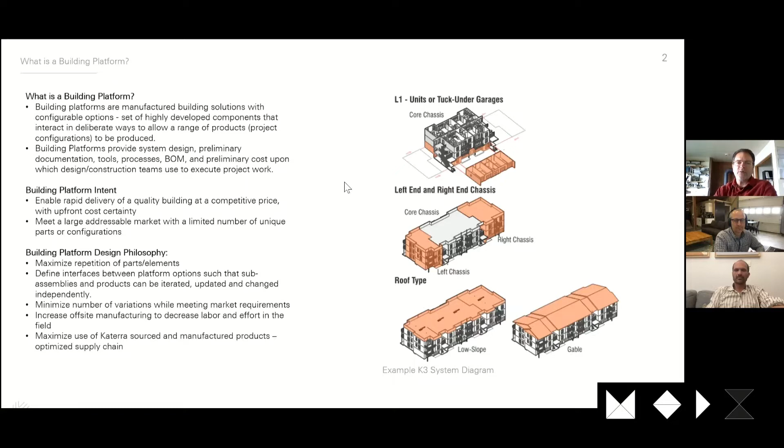But really what we're trying to do here is provide a configurable building solution. And we do that in this size platform by having a combination of fixed and flexible parts to the platform. So in the case of a 3-story multifamily platform, we have a fixed chassis in the middle, and then we can modify the ends. This is a 3-story, 24-unit walk-up that you see all over America.

There are millions of units of this house, and it's one that our launch customer heavily invested in. And so we decided to make this the core of our first platform. And what you can see here is that even with the amount of consistency we have within this platform, there are 288 different configurations that come out of this. And within those, you have thousands of options for interior finish changes.

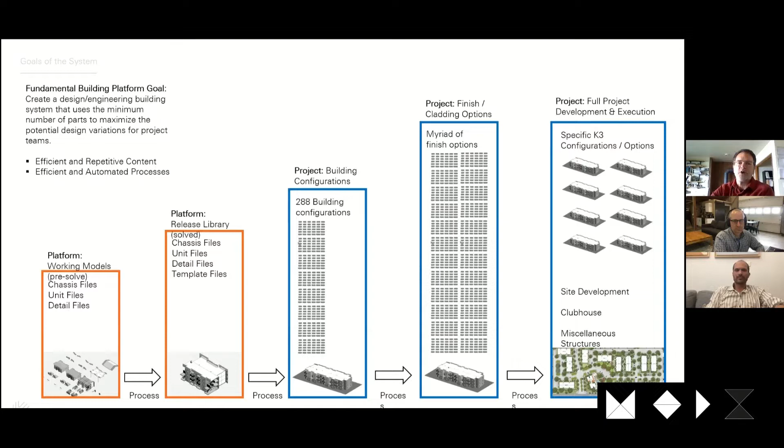And then all of these choices that you make along the way are then configured into an actual building project. So with this particular platform, this is again based on a 3-story, 24-unit building. And we can incorporate tuck under parking, as you see here on the top image. We can have a gable roof in the center or a flat roof, and we have other options as well.

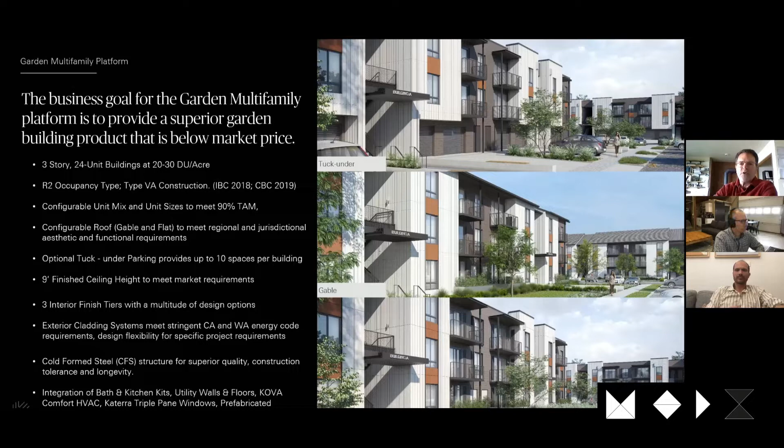But those are the 3 main building configurations. We also have different building assemblies or manufactured assemblies that are part of every one of these different configurations. The kitchen kits are consistent, the bath kits are consistent, load center, and so on. These are manufactured assemblies that we're building in our factory that go into each one of these configurations. And then the flexibility can be in the variation in wall panels and floor panels and so on.

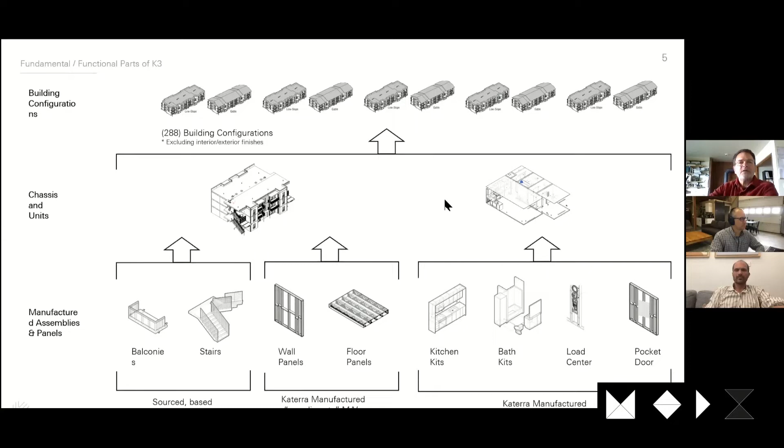So here's a snapshot of what this looks like. We have 12 unit plans that can be arranged in different ways on these ends. The center of each one of these buildings remains constant, and then you can modify the left module and the right module in different configurations. Flat roof, gable roof. We have 2 different types of mechanical system, either a vertical terminal heat pump system or a proprietary KTAC, which is a system that we've developed that is in final stages of manufacturing currently.

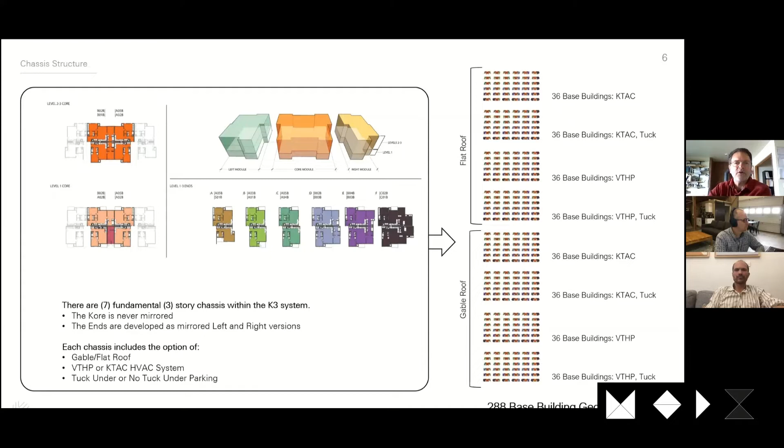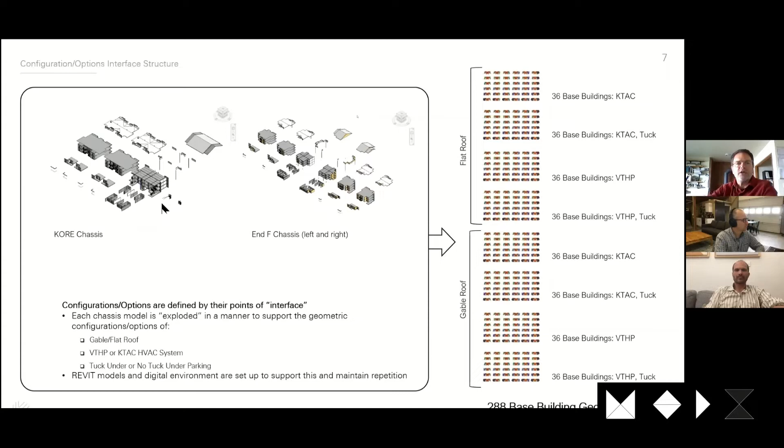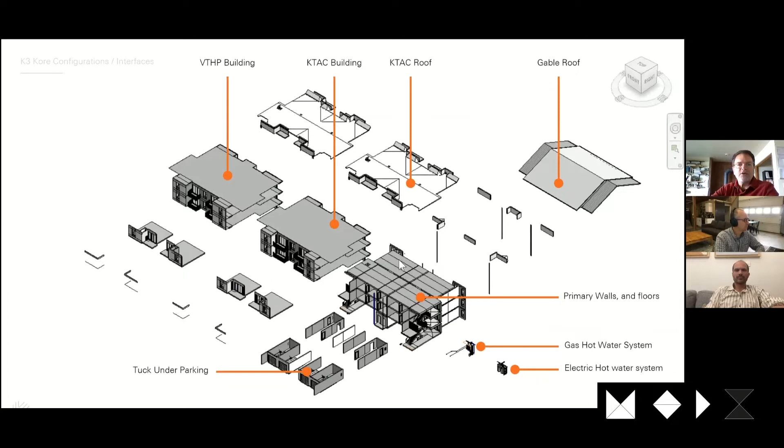So again, some diagrams showing the different ways we can configure this kit of parts. It's a platform being a configurable building system. Each one of these elements within this configured building has to be detailed in a way that architects and engineers are just not used to doing. It's not common in this industry. It's more like how you'd see building an airplane or an iPhone, where you have to have every single detail down to the bill of materials and to the manufacturing drawings.

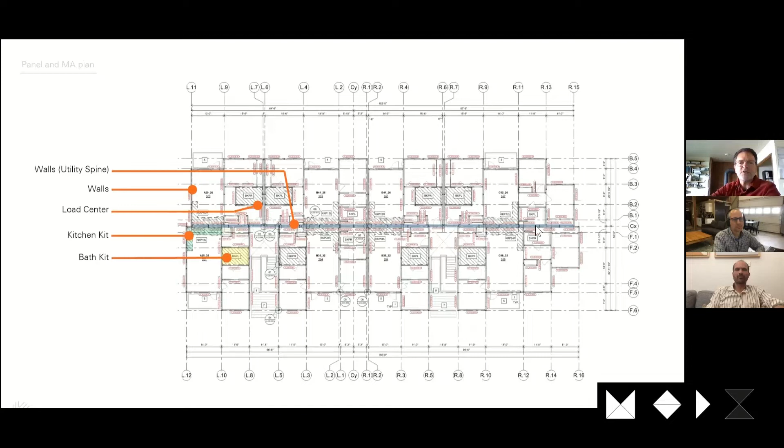This shows some of those common elements. Again, we have bath kits, kitchen kits, and things like that are reusable within various platforms. And then there's still a bit of configurability that's left to the architect. This particular building platform is configured around a central spine. So trying to be economical and arranging all of our plumbing, all of our wet services around a spine.

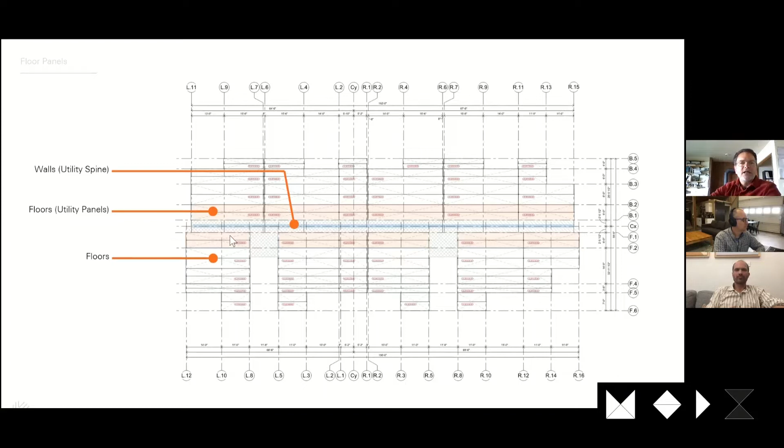This gives you an idea of how different it is to design in this way. With every one of these floor panels that we configure in our factory, that requires 8 sheets of shop drawings just for each floor panel. So you can imagine, to do a fully detailed 24-unit building with this amount of detail is thousands of sheets and thousands and thousands of data points of information in order to provide that level of detail that's needed to go to automated factory equipment, including work instructions in the field for how things are assembled. And it's just truly a different way of thinking about designing, manufacturing, and assembling a building.

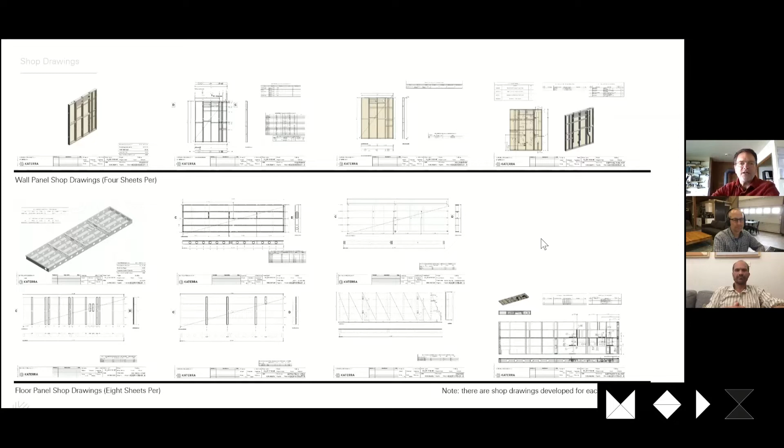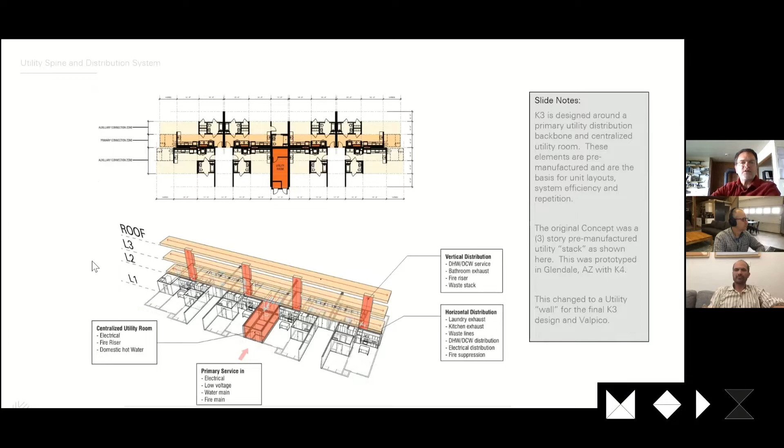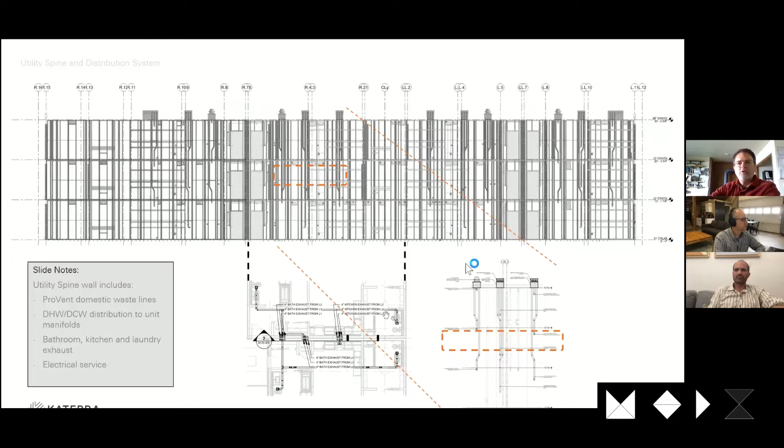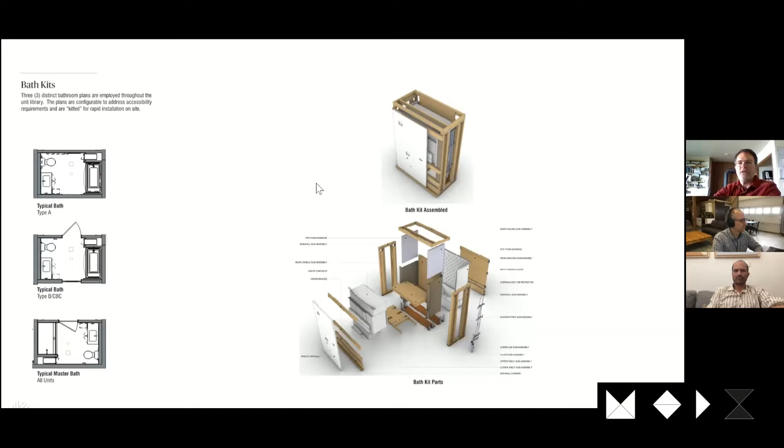This is a picture of how our bath kit works. It's not a full module. It actually comes packaged up. The reason we've decided to go flat pack and not volumetric modular, I think, is illustrated here. This is a way that we can provide the same efficiency of a bath pod, but we can pack it in a smaller volume, so that allows us to be more economical with logistics. This is how that bath kit comes delivered to the site and then fully assembled. Same with our kitchens.

And then on the interior finishes, we have various options. So you can pick from within our catalog. We're a vertically integrated company that owns our supply chain, including our own lighting line, ceiling fans. We have our own appliance line, bath and kitchen fixtures, and so on. They've all been curated to work very well together, much like you'd curate the interior finishes of an automobile, of your Audi. You know for sure that whatever you pick, it's going to look good together. That's the same rationale we have with our catalog of interior finishes.

So you have various options for color and texture. It's a narrow catalog, but it's all extremely high quality. It meets all of our requirements for aesthetics, for sustainability, for environmental quality of the materials, and smart sourcing and things like that.

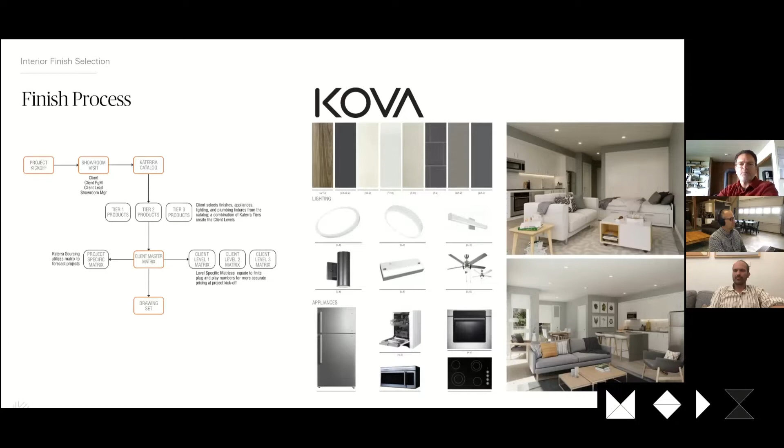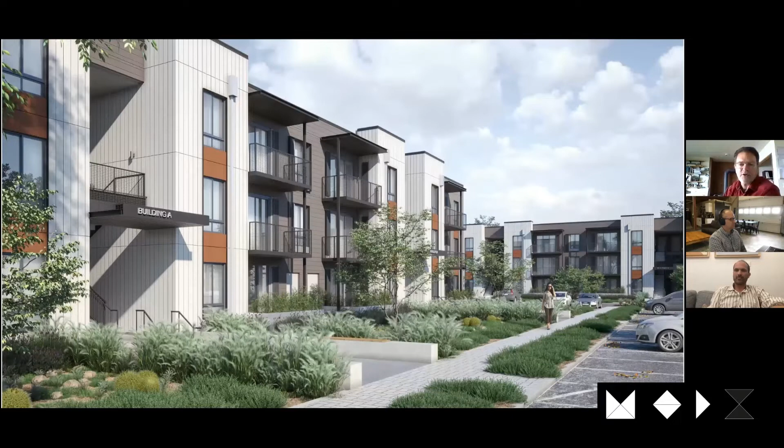So some images, both interior and exterior, of the various options that are available for that 3-story platform. And I can share another one with you, but are there questions, Ryan or Ivan, that you have about that first platform before we move on?

Maybe just to point to the viewers that we're discussing a platform built around a panelized system, so that folks know the kind of building system that it's supporting, the manufacturing system. But otherwise, I think it would be great to hear another example, and then maybe just one question on this particular platform for the walk-up apartments.

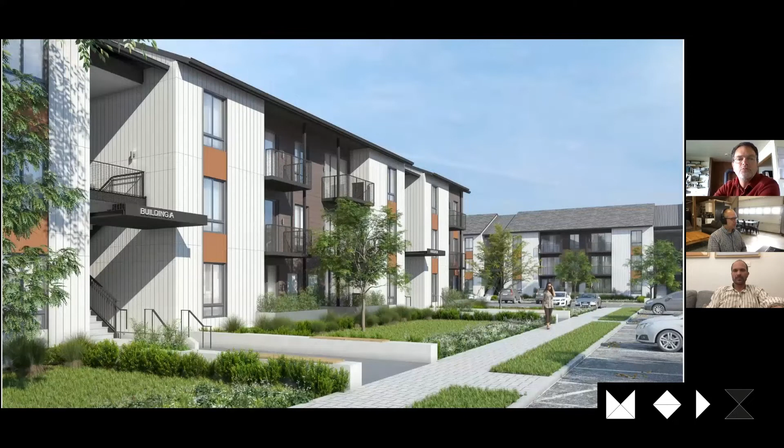Are all of those elements manufactured in the same factory, or, say, like an Apple iPhone, they're manufactured in 3 different places and brought to the job site to be assembled? What is the supply chain strategy? That's a good one. You want me to go back to one of these images and hit on that? That'd be great. Sure. Let me see. Maybe I'll use this one. Yeah, the plan would be great.

So this is the typical unit plan that you see here for our 3-story multifamily garden platform. And what you can see, some of these shaded walls, this is, again, a flat pack, not a full volumetric modular approach. So we have the ability to manufacture all of these items in our factory in Tracy. So we can do wall panels, floor panels, bath kits, kitchen kits, load centers, cabinets. We have our own window line.

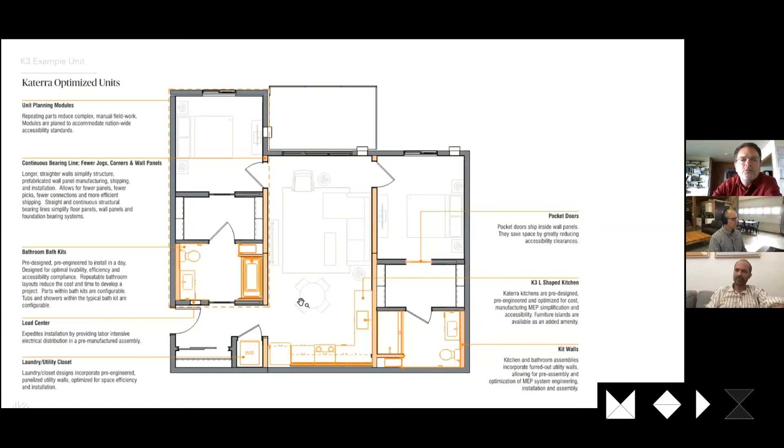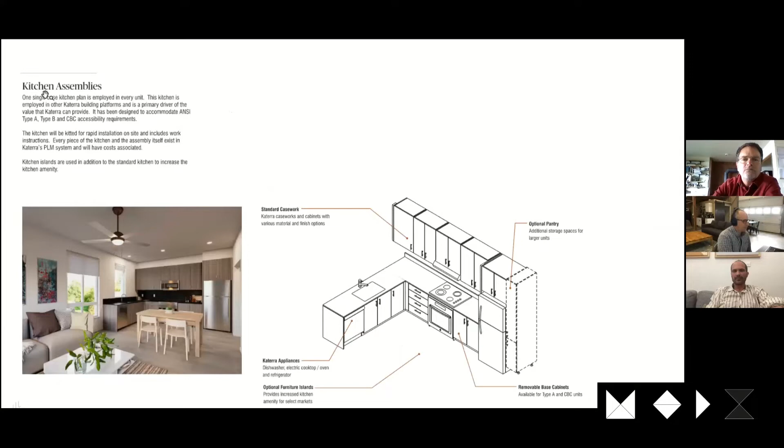That's all done in our first factory in Tracy, and we plan to have multiple factories across the country to be able to provide the same capabilities. Okay, that helps. In Tracy, California, right? Yeah. That's great. Why don't you go on to the office platform? Okay.

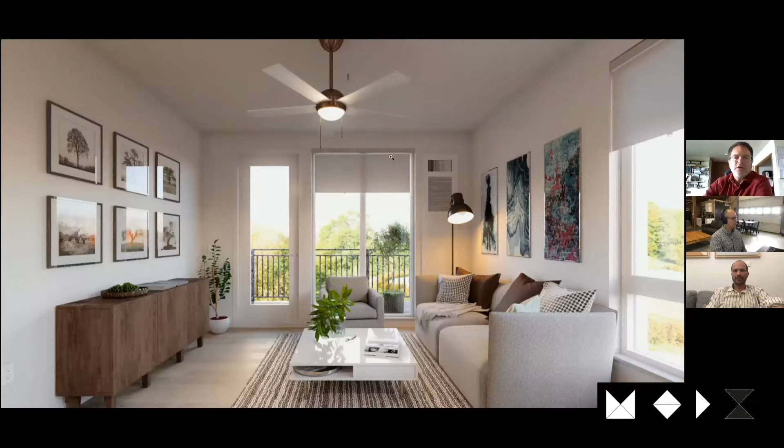So the next platform I will share with you is quite different than the first one. The K3 low-rise multifamily platform is built around a particular building type that everyone is familiar with if you're in the multifamily world, that 3-story, 24-unit walk-up building. In the case of commercial office, it's very rare that you would have exactly the same building configuration repeated. So in our mid-rise platform, we have to provide much more flexibility.

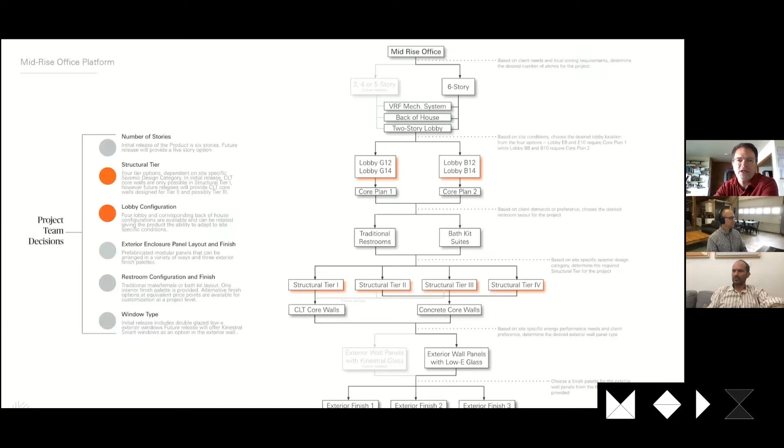We also have some interesting challenges in commercial construction regarding the structural requirements of the building based on the seismic zone, wind load. We have different climate constraints and climate zones that have an impact. There are different labor issues around concrete versus steel that can impact how you design things like your seismic system. So all of those things have to be considered when you're trying to design a 48-state solution platform for commercial office.

At the heart of everything we're doing commercially is mass timber. We built a mass timber manufacturing facility in Spokane Valley, Washington. It was the largest investment the company has made in manufacturing capabilities. It's a very big bet on CLT as a new way to build that's going to drive a lot of new building techniques in the future. And when you think about CLT and its advantages, it's just perfect for the Katerra model of offsite fabrication and field assembly.

It's a very large format product. Our press is 12 feet wide and 60 feet long. It's made with incredible precision, within a few millimeters in a 12 by 60 panel. Very few people are needed to manufacture the material compared to volume, and very few people are needed on site to assemble it. So the efficiency is tremendous, and it's perfectly suited for the kind of modular and off-site company Katerra wants to be. This is, again, not a volumetric modular approach, but more of this flat pack approach.

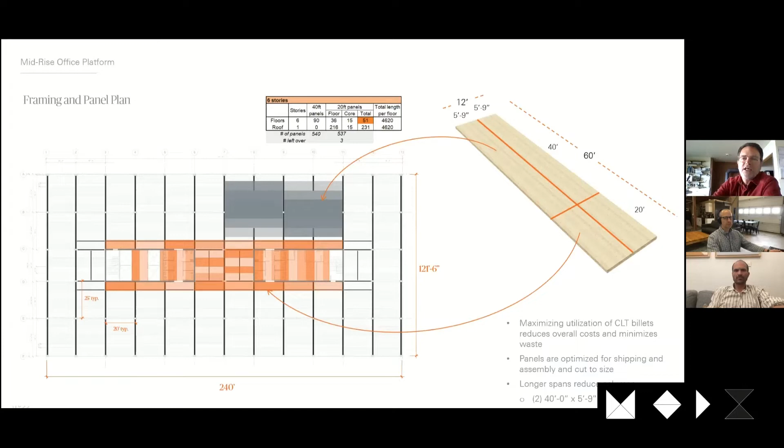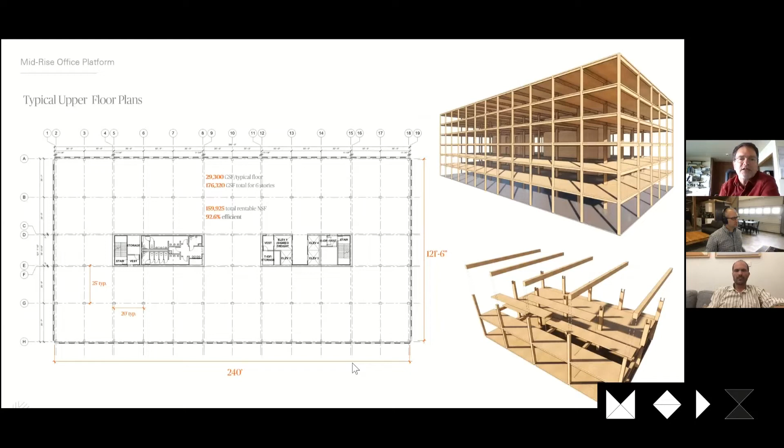So our system is built around a 20-foot module that works well with our 60-foot panel. We can cut it into 40-foot and 20-foot panels for ease of logistics. The 20-foot panels we can use around things like the building core where you have different loading. So these platforms have to be designed really smart around the manufacturing capabilities. Multifamily is built around our Tracy, California plant; commercial office is built around our CLT plant in Spokane. Yeah.

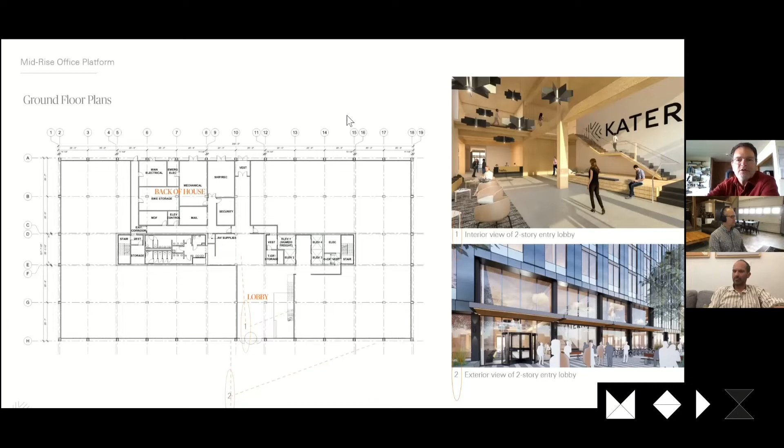Here we go. So this is a representative image of what a Katerra commercial office platform building could look like. There again, there are all kinds of options in terms of the final exterior finish, and even the number of stories, the length of the building, the width of the building. But it is designed around a module, that 20 by 25 module, that is super efficient for us to manufacture in our factory. This includes the option for a 2-story lobby.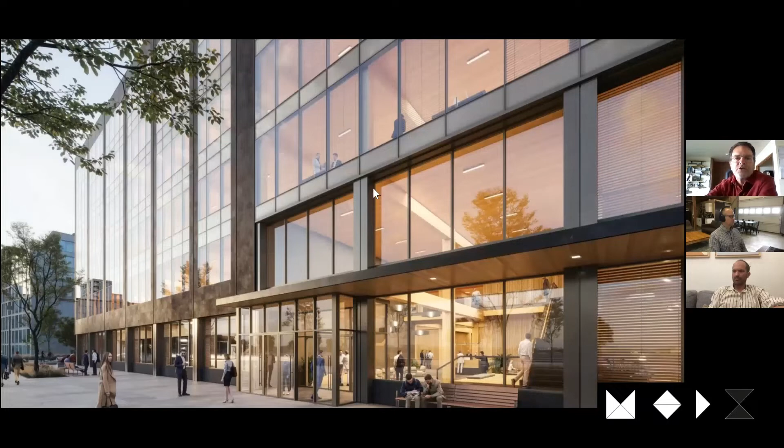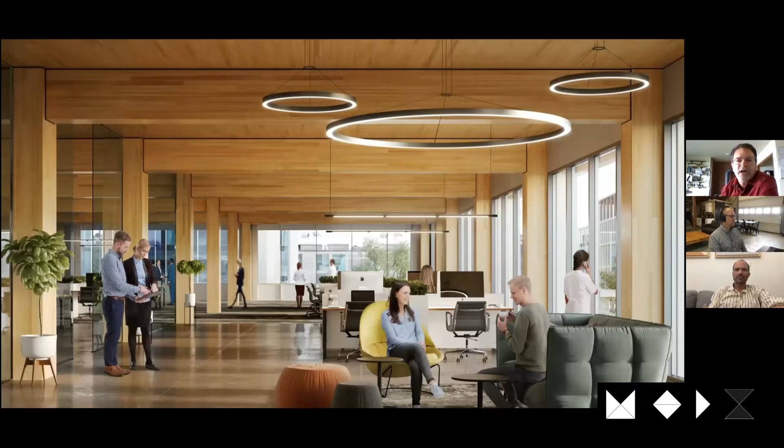And here you can see the building structure. This is that 20 by 25 grid, which we've determined to be the most economical way to fully utilize a combination of a glulam and CLT office structure. We've designed it around a 48-state solution, so we have automated engineering that goes into this based on the seismic zone.

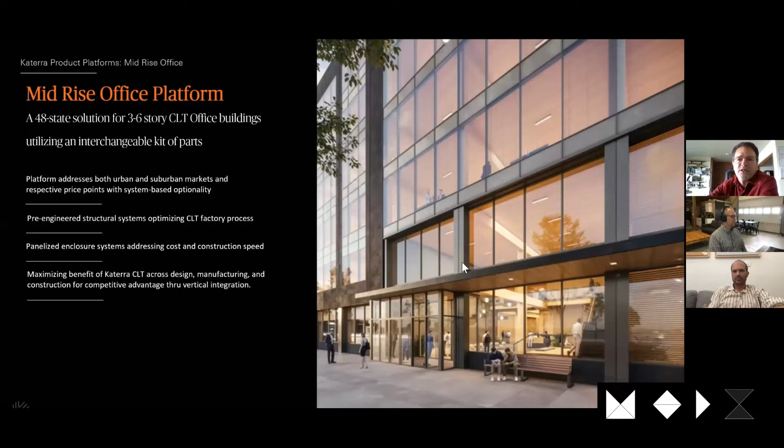And again, various configurations for the exterior skin. We just provide some general guidance of what we can provide out of our factories, and the design team, architects, and developers can choose to do whatever they'd like to do for the exterior. We're doing some. No, I understand.

Go ahead. Well, I know that you're manufacturing all the CLT, and then you have a supply chain of finishes, lighting, HVAC. I wondered, specifically on the exterior enclosure, if you own that exterior prefabricated enclosure company, or is that a third-party manufacturer still? Yeah, good question.

Yeah, for the exterior skin of commercial office, we are currently developing some window wall options that utilize our cold form steel capabilities out of our Tracy factory. Obviously, when we get into these taller buildings, we can't use our vinyl window line, and we'll have to go to a commercial product. But we have preferred partners that are part of our supply chain.

We have companies in Mexico and a company in Wisconsin that we can combine the IGU units and the aluminum frames and assemble those into a very cost competitive exterior skin. So we can offer that. And we can offer a curtain wall system as well. Mm-hmm.

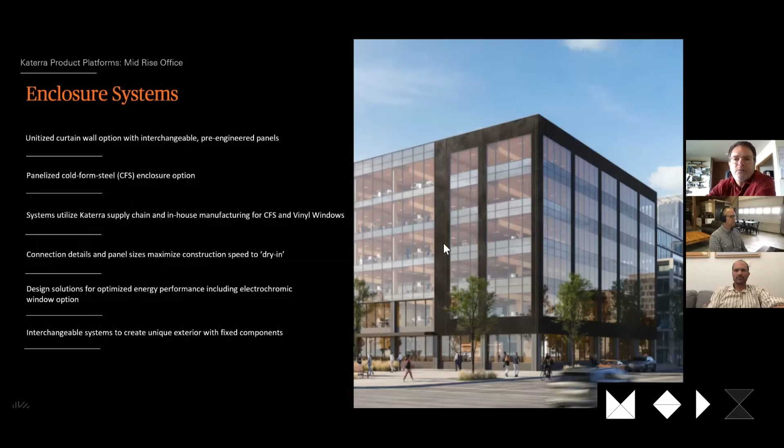And our commercial line is not as developed as our multifamily line, but it's coming along. We do have a configurable conference room system that we do have available. We have a commercial lighting system that we just launched. And we're working in a partnership with the McKinstry company. They are developing a product. It's a new spin-off of McKinstry called Overcast.

We are utilizing a different software in the commercial office platform, and this might be something that we take to other platforms in the future. We've been very impressed with the difference it makes when you're using a software system that's actually designed for manufacturing. Revit is really not. It's mostly a 2D based system. And with CATIA, we're able to generate our bill of materials right out of the model. We can easily tie costing to every element in the model.

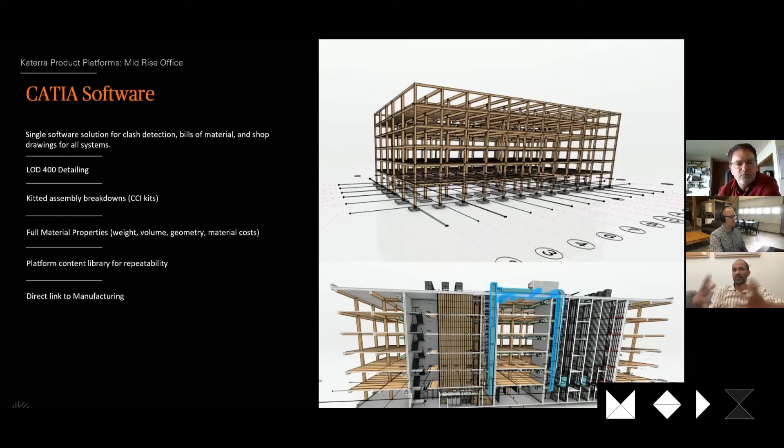We keep finding that while they're willing to invest in offsite capability through a factory space and even with some automation, one thing that they seem hesitant on is investing in the kind of vertical integration, particularly the kind of design integration that you've shown. What would you say, and these are really high level, what are some of the key factors?

I mean, Katerra obviously is a very large entity. It has good funding, but obviously at the end of the day, Katerra is also interested in being economically viable. What are some of the key factors that drove Katerra into this kind of major investment, not just into vertical integration and the supply chain, but really this upfront thinking? You were one of the first four employees. This upfront thinking about vertical integration, about design platforms, and about an audience that maybe is smaller, but what is the value? What do you see as the real value of design from the perspective of economics, of supply chain, of manufacturing?

Yeah, great question, Ivan, about the quality of design. The way we look at it at Katerra is, even if we're successful and we provide a product that is less costly out of the factory and it's easier to assemble, we won't be able to sell it if it doesn't look good, right? It has to be a high quality product. And design is at the forefront of what we're doing. Apple obviously is the example that we use a lot. Design sells that product. It's user experience, and we would like nothing more than to have a brand to Katerra that's based on that quality of design.